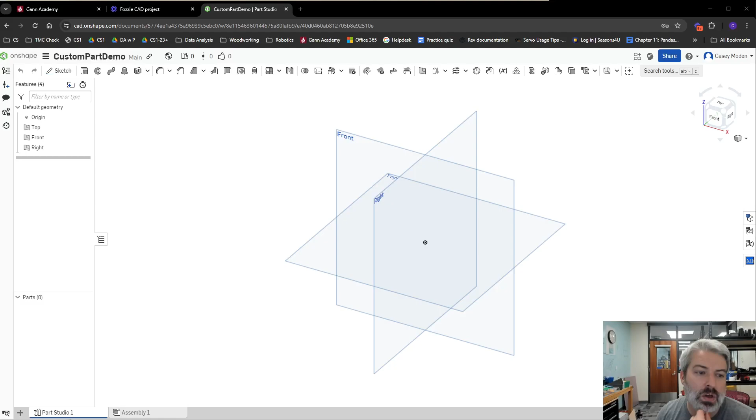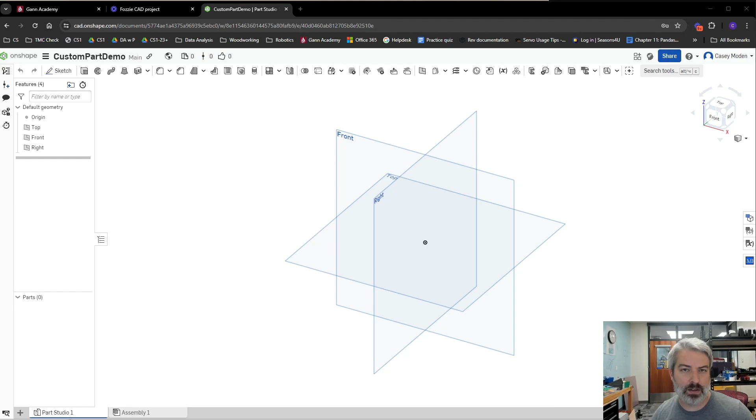All right, so in this video I'm going to walk through making some custom parts, starting with a blank screen. We're going to add in some pieces we'd typically use, for maybe designing a custom claw or something to go with some goBILDA parts. We also want to custom design some 3D printed parts that would be lightweight and well suited for our designs, rather than using the big clunky metal goBILDA pieces. So I'm going to import some parts in here, get things set up, and then check back in, popping back in and out as I'm building this thing.

All right, so one thing I'm uncovering as I start putting parts in - I've got a couple of parts in here, I was able to find them by looking through the goBILDA Parts thing, and I kind of roughly know where things are likely to be. But if you guys are doing this, it's probably going to be a little more difficult for you to get done.

So I would open up the goBILDA site. I searched for things - I kind of have to know what some of these are called, but if we just look up servos, we get a whole bunch of options for things we might want to use, because we definitely need some servo attachments. That ends up being what this is, it attaches onto the servo.

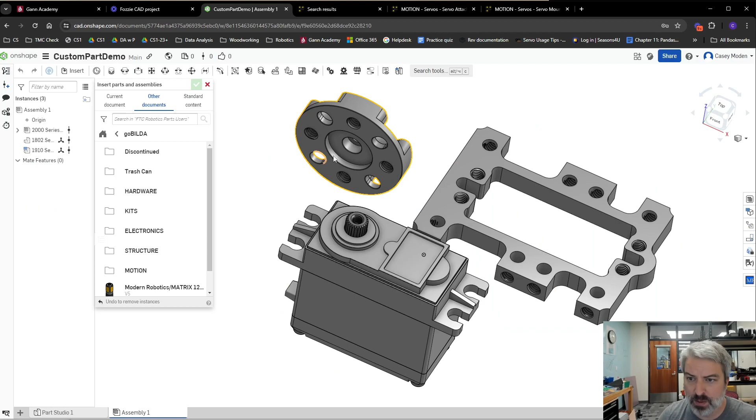We might need some servo mounts - that's what this part is right here, if we want to find the actual servos. But sometimes it's easier to go to goBILDA and use their search tool rather than just looking directly within OnShape.

So we go into here and we can pick out some of these servos, find the SKUs, and import them correctly. Also, goBILDA can be helpful because it'll show you some other optional things, like hey, this is what people typically use with these, well consider using this. So one thing I wanted to look for here was finding a hub.

I want to find this kind of thing that has the servo hub with the shaft on it. There should be two different types - one has a slightly shorter shaft, which would be better. But really what I was looking for were these other pillow blocks that go with it, the through-bore mounts that go with it.

This is 10 millimeter, I think I need 8 for the other one. Anyways, so I know for the one I imported, this actually has an 8 millimeter diameter, so I need to pull in this 8 millimeter bore.

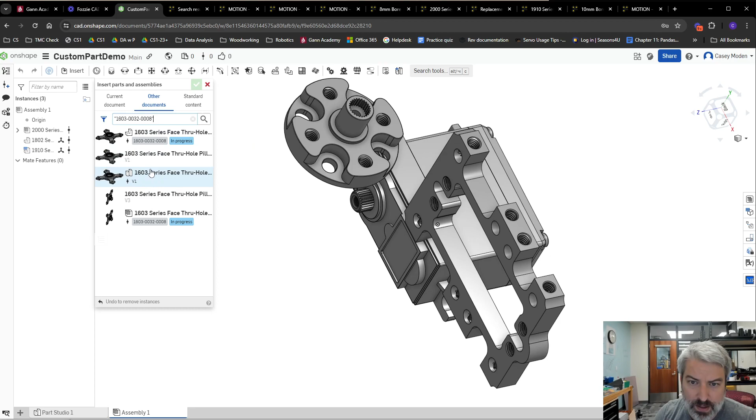This thing here, so I'm going to grab this, I'm going to grab the SKU for this. I need to go to other documents - goBILDA - and search for this particular SKU, and then I should be able to pull through one. I think these all look about the same. I want to choose one that's not in progress, so it doesn't give me any annoying errors. And I should be able to click this in here.

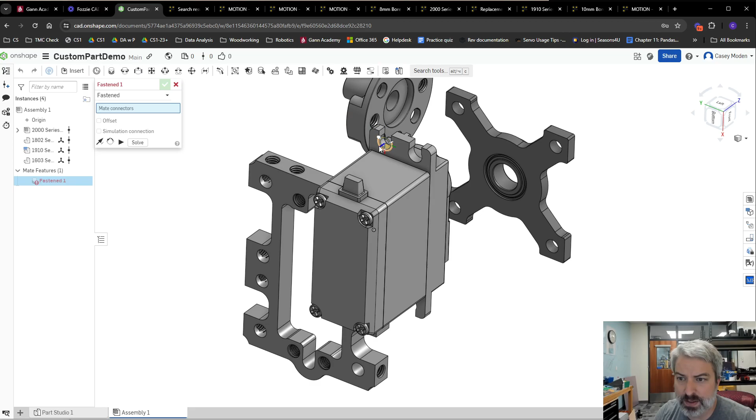Now I have all the parts that I really need to get this done. I would start by getting these things all lined up correctly. I think this is facing correctly, so I'm going to try and just get a fasten on here. You can skip forward here too if you already know how to do this, but we're going to try and mount some of these things up.

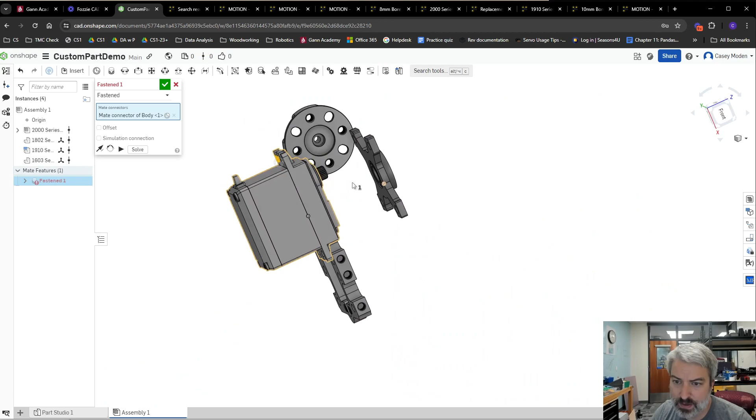A little concerned these won't align. Oh, that's not the correct one. So let's go back, we're going to hit fasten, choose this thing here, and then I need to choose on here. I just chose the wrong part - choose that on there.

Yeah, pretty close. All right, so quick update with this. I just used a couple fasten mates to get these attached. I have at least these first 3 parts attached: the servo, the housing, and then I just need to put on this piece.

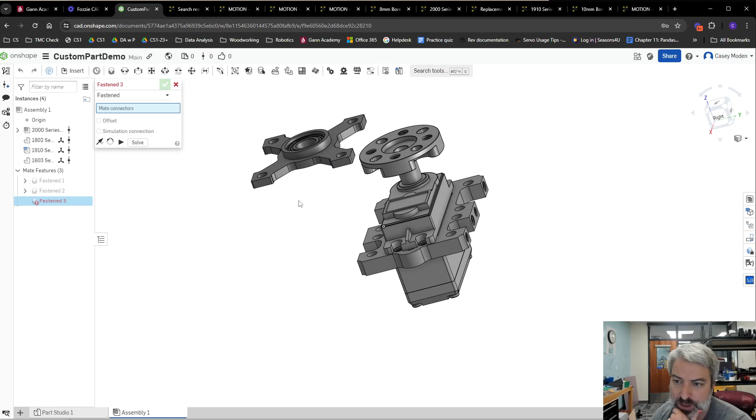I think I'm going to put in some standoffs here. Let's see if I can find the right ones for that. All right, to try and get this lined up, just to figure out what length spacer, I could just kind of guess and check, but that's kind of defeating the purpose.

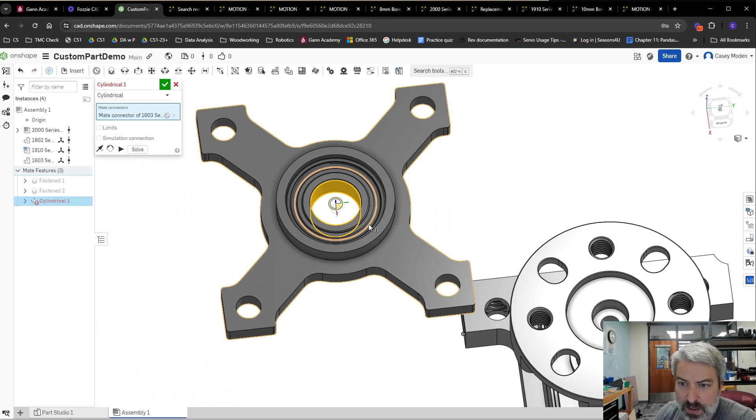I think what I really want to do is put a cylindrical mate on the inside of this thing, and then put it onto this part right here. I might want to flip this, I think that side looks better, facing down that way.

And then I just need to find a piece. Now I can obviously slide up and down like this. One thing is I do need to figure out how long I want this piece to be. I think I have this all lined up correctly, looking good.

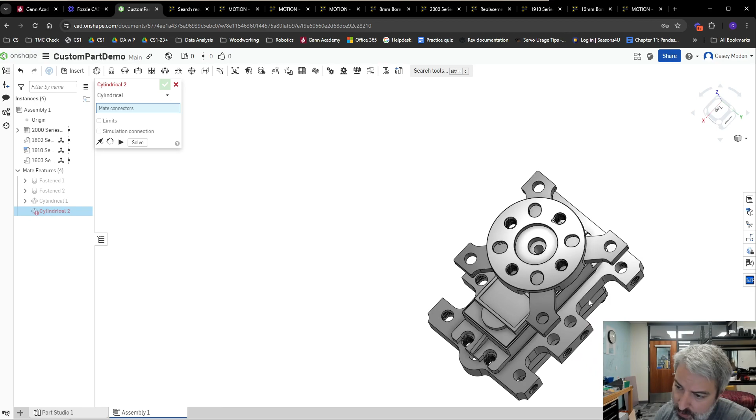I can measure these two, this distance from like here. Oh, I hit the wrong button. We should be able to select this, select that. We can find the minimum distance is like, the center distance is about 1.6 centimeters, so that's gonna be like a 16 millimeter spacer.

So let me go find a spacer like that. I'm going to go back into this, look for a spacer. And let's see, these should be all the different spacers that we have. I wonder if we can do a 16 millimeter spacer.

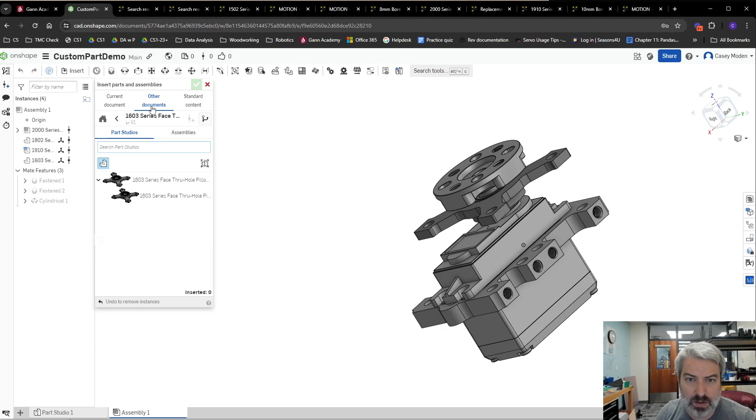Something like that should be good. Grab this piece. All right, so we need this one. Go back into here, insert. Grab this and put that into here.

All right, need 4 of these. I could just grab 4 more. 2, 3, 4. Check. All right, so yeah, maybe I'll just make this a separate video, but we're just gonna go through and attach these in here.

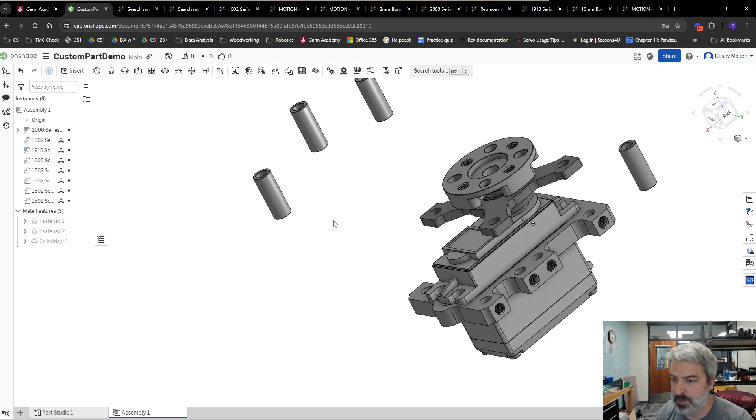And then we should at least be at the right starting point for this. So I'm just going to do a little bit, a couple fastens on here to get that done. I'll show you maybe the first one, and then hopefully you can do the rest on your own.

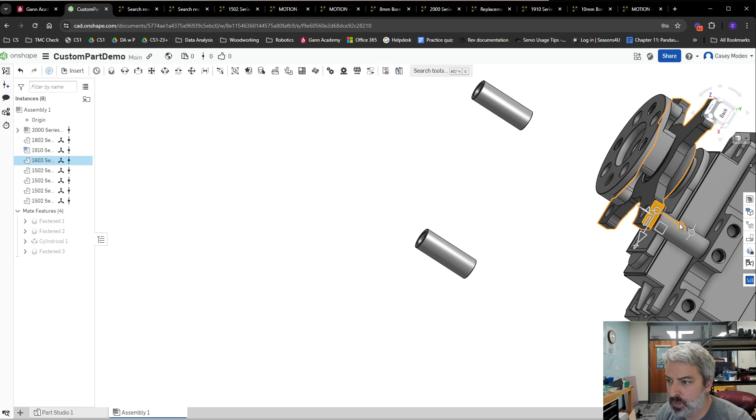So I'm going to select the outside of this face like that, and then for this piece, I'm going to grab this one, drag it out of the way to begin with, and then I'm going to go through and fasten this part and this part to get them mated up.

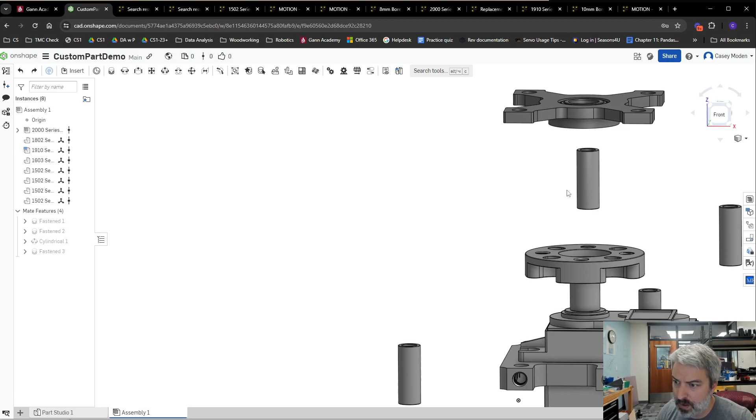And now I think I should be able to just go through and hit these other ones. Ooh, I got a whole bunch of errors. Oh, that's not good. Yeah, let's pause, it didn't like that double fasten.

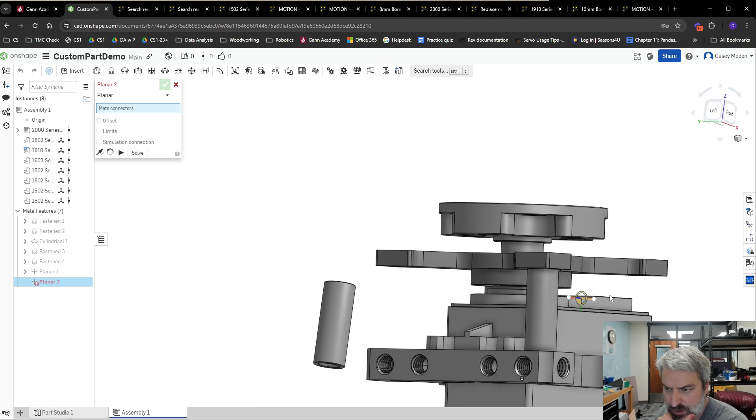I'm gonna try and just do a planar mate instead. The top of this thing should be flat with the top of this thing. I don't know why that shouldn't really be an issue. Oh, it doesn't like that for some reason. Oh, it's just the next planar. Okay, don't know what's going on with that.

That's a little bit weird that the fasten didn't work. Oh, maybe because I fastened it on this side already. Maybe that's what's going on there.

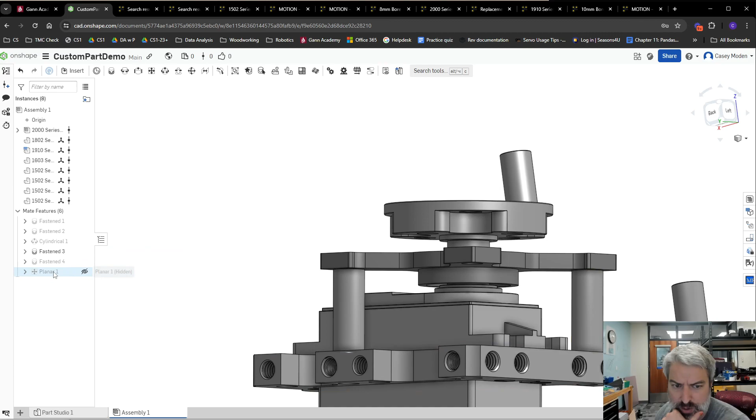Anyways, all right, so that should work. So I should just be able to fasten these other ones, get everything set up just right, and that'll be the end of it. All right, so good place to stop.

I got everything set up in here. There we go. We have at least the basic structure, and then we start thinking about maybe building. I'm going to try, as a next step, to do the printing of a claw maybe on top of this to design this out.

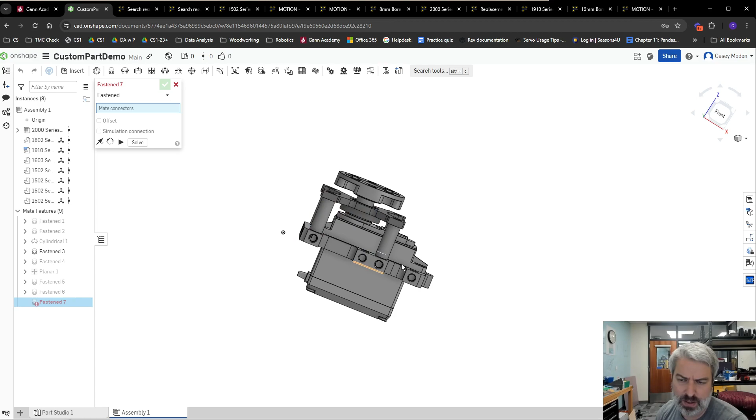And I think honestly I could totally redesign this without using this particular setup. Maybe I could 3D print a part that takes the place of this structural piece, but I think this is also maybe a good thing to include. So I'm going to stop that there and we'll move on.